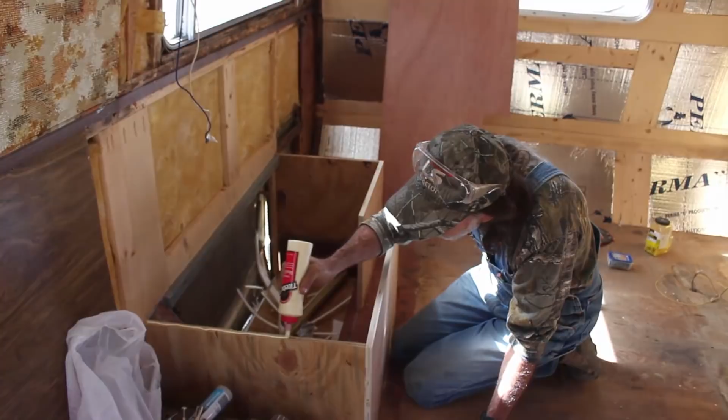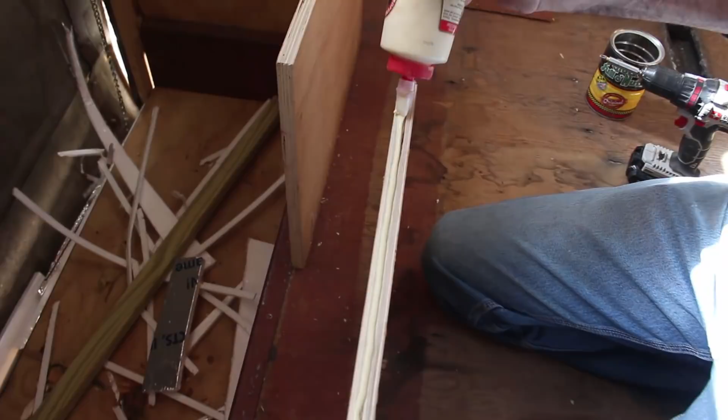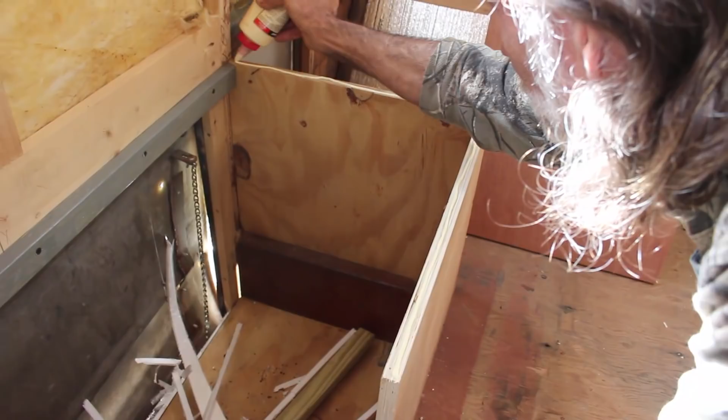I like to put a good heavy coat of glue, and I use Titebond because it's non-toxic, and it is one of the better glues that I have ever found to fool with. I like to put a good bead of it on top of it. I want all the support in this thing I can get, because like I said, this thing will probably be moving around, and I want to make sure that it's well supported.

Okay. We can get our top here. We're using 3/4 inch plywood on this cargo box. That's what was originally on it, so we're going to put that back. Try to get it, looks like it's fitting good. And actually this is just rough-in stuff. We're actually going to come back and cover this with something else later on. But we're going to try to make this fit.

I always want to screw what's next to the wall first, because that way you know you've got it when you do that. Make sure it's held tight, because you can see you want a good tight seam.

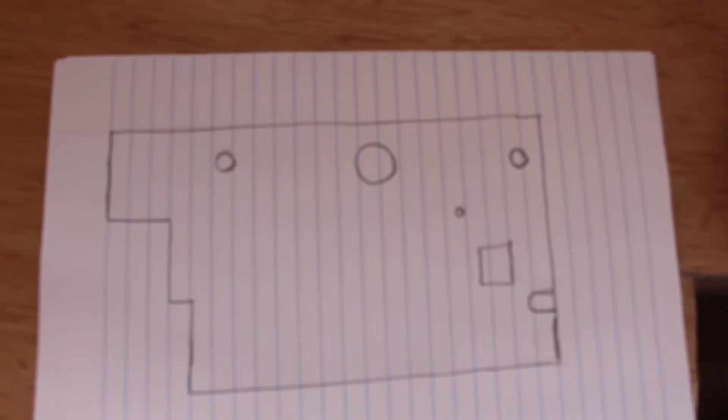Okay guys, one of the better things to do is to draw this stuff out on a sheet of paper, and I have every hole I have to cut. They're not to graph or anything, but I want to know on my paper where I'm going to be cutting these holes out. And the first thing you want to do is measure all the perimeters and get all of that established before you start measuring your holes and squares to cut out. So that's what I'm going to be doing to start with. I'm going to try to get all my perimeter measurements. 17 3/4, 18 1/2.

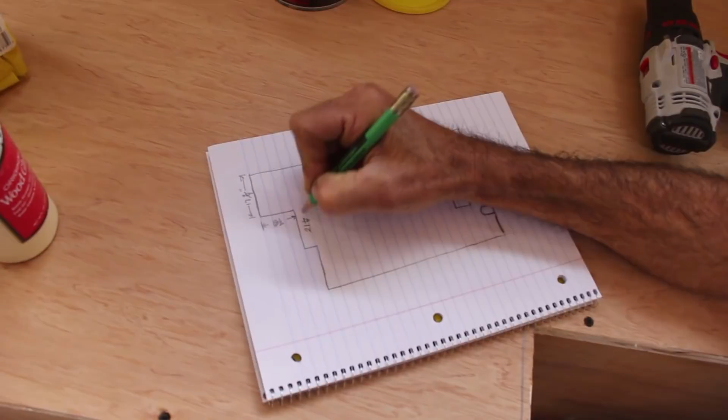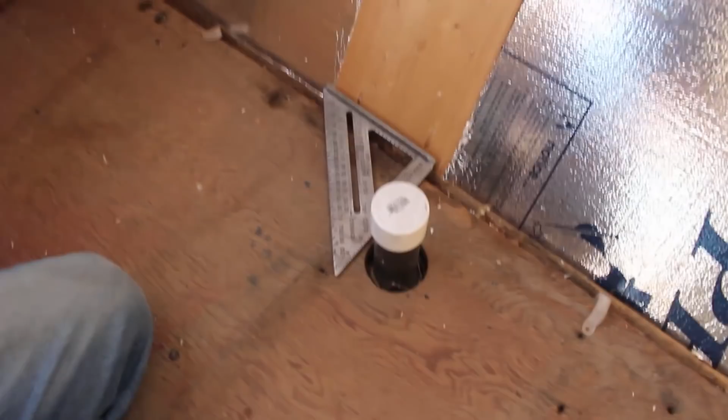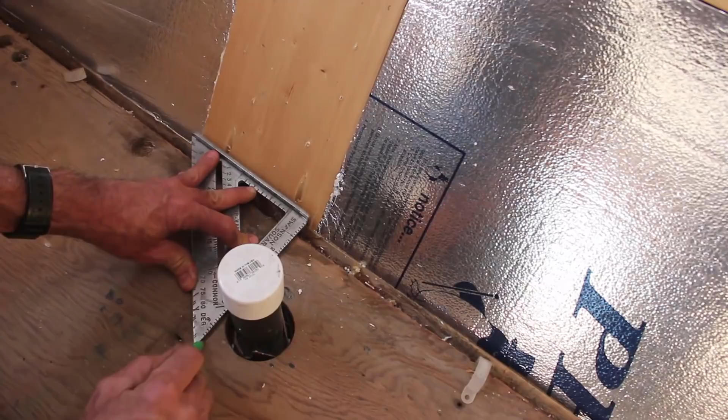Okay, a lot of people don't know how to come up with measurements for things like round pipes and stuff like that. I'm just going to use a speed square to show you how to do this. The easiest way to do it is to take your speed square and put it against the back of something that you know is square, like we know the back of this is square, and you want to draw your pencil line across here like this so that you actually have something to measure to. This gives you a way of measuring. Now, if I measure from the other side of this hole to my pencil line, I have a 2.5 inch hole there.

I automatically know if this is 2.5 inches from here to the pencil line that I made, that half of that is 1.25 inches. So I'll take my tape measure and I'll find 1.25 inches on it here, and I mark it. And what that does is that gives me the center of where I need to drill this hole in this direction. And basically it'll be the same thing when you go this way.

You want to always turn your tape measure up on its edge, because if you put it down flat ways, it holds you off of the wall, whatever your angle is. This one happens to be about 3/16 of an inch, but if you turn it up on its edge, then it gets you all the way to the wall. Now if I do it this way and I look on the back side right here, I can already tell that it is 3 3/4 inches to the back side of this.

So what you'll do then is take your drawing here, and I know that this distance from the back of it here is 3 3/4 of an inch. Then what we want to do to get this other measurement, being we know the center of the pipe now, we can come here. We see that it is 29 3/4 of an inch. So what I'll do is I'll come to the center of this pipe, and 29 3/4 inch. That gets me to here.

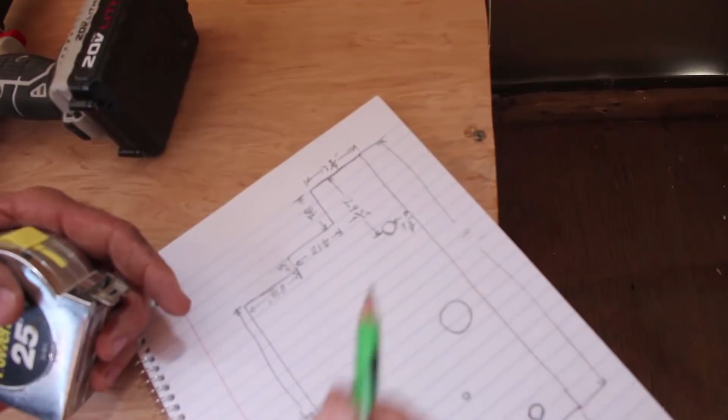But now the 3 3/4 was to the edge of my hole there. So we know this was a 2.5 inch hole, so we're going to add 1 1/4 inches to this. So what we'll end up with will be 5 inches to the center right here of that. So now I'm going to take away my 3 3/4, because I don't need that now.

And we're going to put this is like 3 3/4, and 1 1/4 makes 5 inches from here to here. So when we make this cross in the center of this, that is where the center of our bit will go. And when we drill our 2.5 inch hole, it should be exactly where that is at.

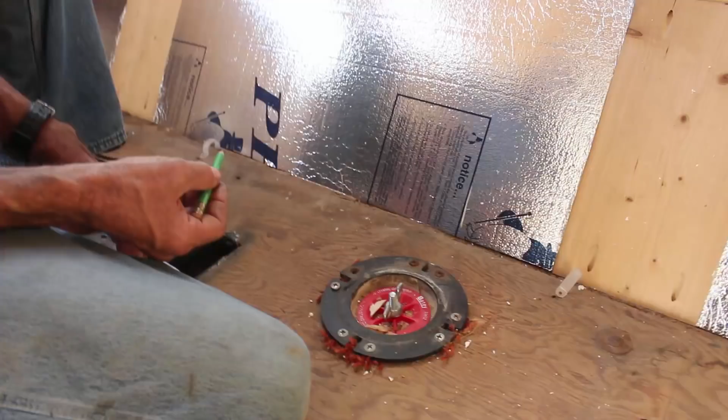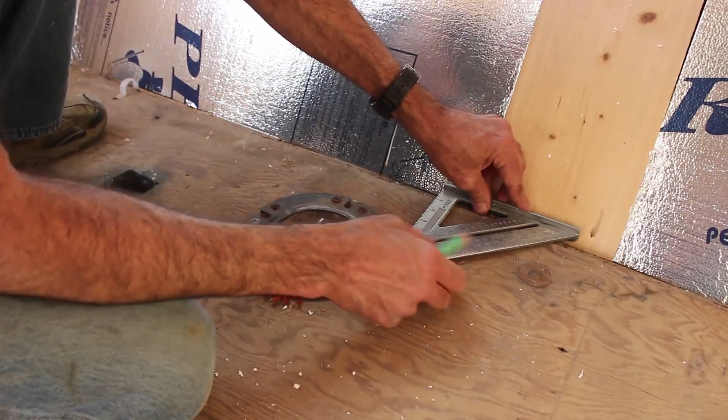Okay guys, this one's a lot larger in diameter, so we're going to do something a little bit different on this one. I'm going to set my square up where it's just barely touching the wall here. I'm going to draw my line, because my square is touching the edge of this now at its widest point. Okay, we're going to move our square over to the other side. We're going to set it up, and we're going to do exactly the same thing there. Now we have 2 lines here. This will tell us the exact width of this here.

And of course you could just measure right here, but you got a nut in the way and it kind of gets a little bit aggravating. It says it's 7 inches. Let's check back here. And see, that's the whole issue here. This, with that nut being in the way, says that it's 6 7/8. And when I measure back here, it's 6 3/4.

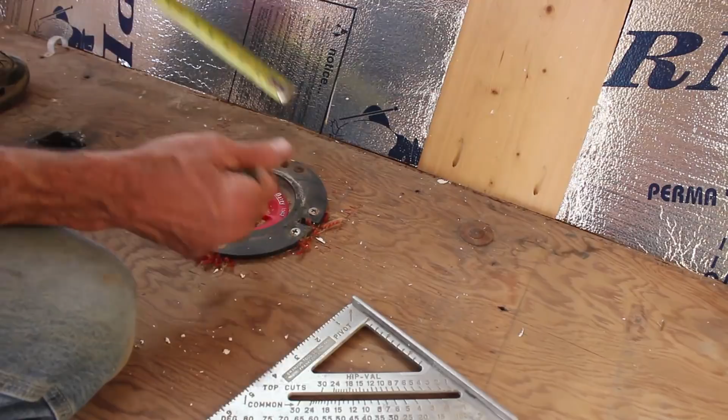So the tape measure bowing over that is giving us a little bit of a false reading, but you don't have to be exact, because you can leave a little space around it. It's not going to hurt. If you ever go to use it, your wax ring is actually what seals that up. So we know that we've got 6 3/4 that away. And then if we come off of this back wall, it is 4 inches to the back of this right here. So we're going to put that on our paper again.

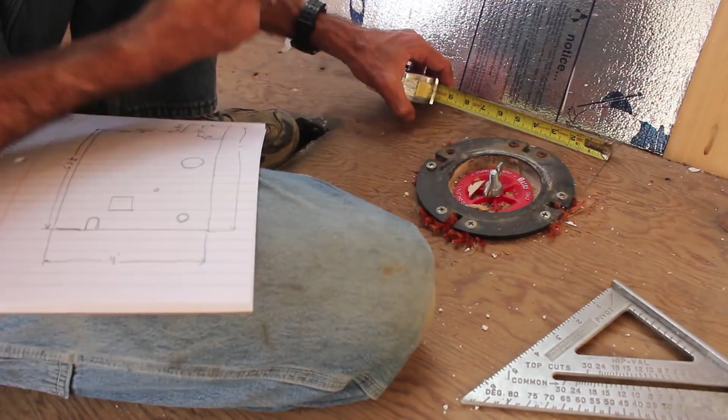We know that if this is 6 3/4 of an inch right here, that half of it is 3 3/8. And what that does is that gives us the center of this here. Now, of course, I could lay a square on this wall and pull it right over the top of this right here, and that'd be close enough. And if you want to do that, that's fine. I'm just breaking it down to show you the actual way to do it. And now that we have the center mark here, I'm going to go all the way back to my wall over here.

And I'm going to measure across. And according to the wall, it is 57 3/8 of an inch to the center of that. So on here, we're going to put 57 3/8 inch to that center. Now that's going to be from our wall over here to here.

Now, coming off of the back, I can't really lay my tape measure up here and do this because this is a slanted wall, and if I do that, that's going to give me a false reading because my tape measure is like a ½ inch off the floor and it's going to shove me way back. So I basically have to go down low like this in order to get an accurate measurement, which is 4 inches. And we automatically know if it's 4 inches, then the center of this was 3 3/8.

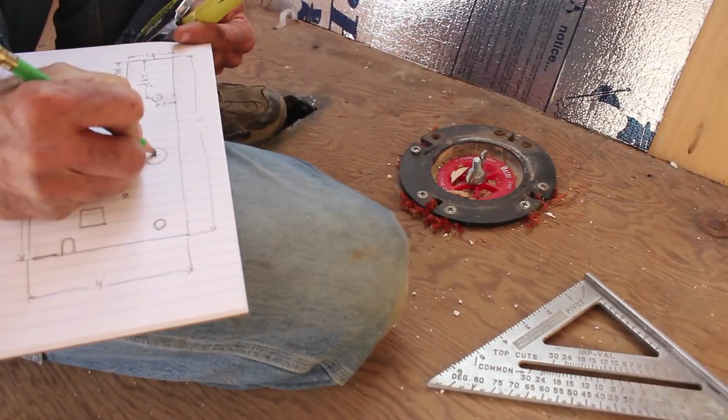So we're going to add 4 inches to 3 3/8, 7 3/8 of an inch to the center of this. If we make our cross in there, we can put 7 3/8 inch. And that will get us to the center here so we can make our circle. Now, because I don't have a bit big enough to drill a hole this size, I'm going to have to take a jigsaw and cut it out.

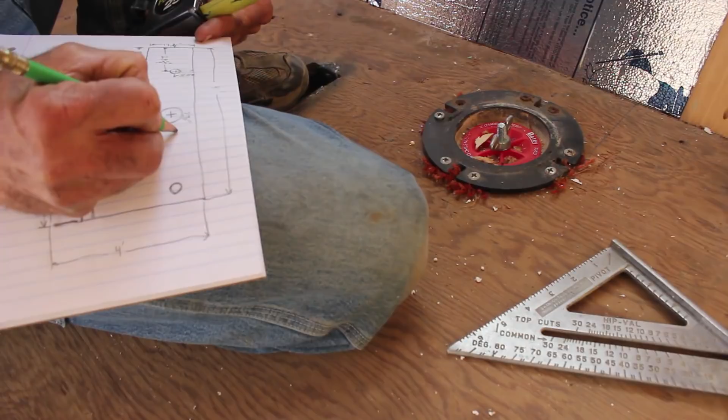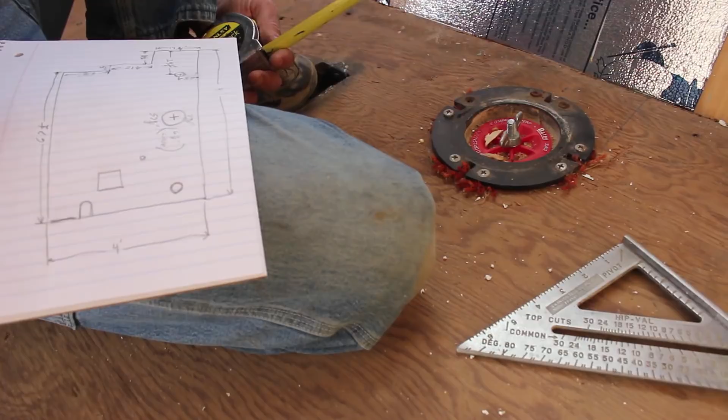So out to the side, I'm going to write 6 3/4 inch circle. And I'm going to put it in parentheses so that I know that that's the diameter of this. Now I'm probably going to fudge a little bit. I'm probably going to cut this like 6 7/8 because you never get anything exactly perfect. And I want to make sure that I have a little bit of room to slide this thing around and move it just a little bit. And what I'll do is come back and fill this full of silicone or something around it here if I think it's going to be an issue.

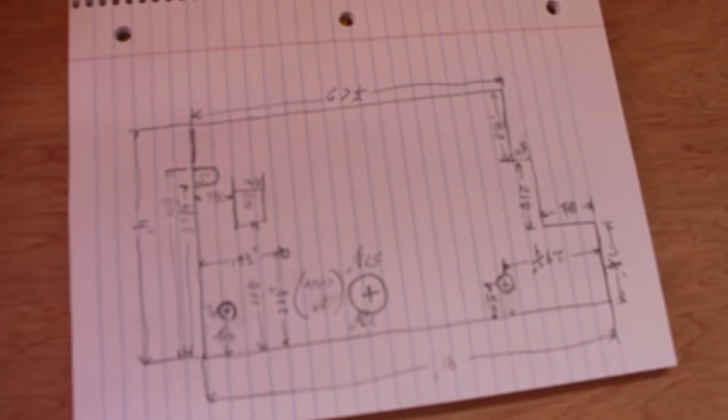Okay guys, this is everything measured out. I know you probably can't read it there, but that's how many measurements there are on this one piece of plywood we're going to be putting down. We're going to pray that after we get it cut, it actually fits.

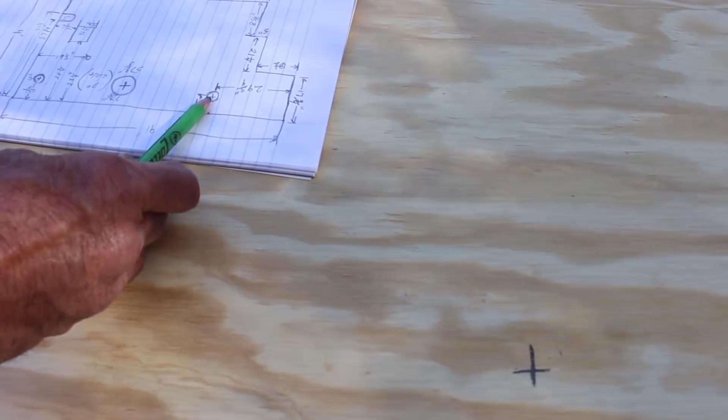Alright, let me explain a few things here. Okay. Let's get our piece of paper out. This X you see right here is this X right here on the paper. And the way we got that is we measured from the end of our plywood here where our mark is at to here. Now, as you can see on the plywood, we have all of our zigzags marked over here, up here, and then across, and then up. Just like we have on our paper here, to all the same measurements.

Now when it comes to the big circle here, I ended up going with 7 inches because I want a little bit of play around it. I don't want to get in there and find out I'm just a little bit too small in some areas because I got to shift the plywood a little bit. I went with a 7-inch circle.

If you don't have anything 7 inches in a circle, I did this demonstration here. You can either use a string and a nail, or you can take the tape measure, and half of 7 is 3 1/2. You can put it on that mark there, and you can mark here and here, and you can rotate it just a little bit. Keep it on that center point, mark 7 on your tape. You can keep doing that around in a circle until you've created this row of dotted lines here. And that will give you a complete circle.

Now you can take your pencil and finish it out because it's not really that crucial. I mean, I can sit here and finish this circle out with a pencil all the way around. I'll have a solid line when I get through. Make it really easy to cut. And that's probably what I'm going to do here, just go ahead and do this all the way around, because I'll be using my jigsaw and I don't want to have to be hunting or waiting for the next dot. I want to know that I'm pretty close.

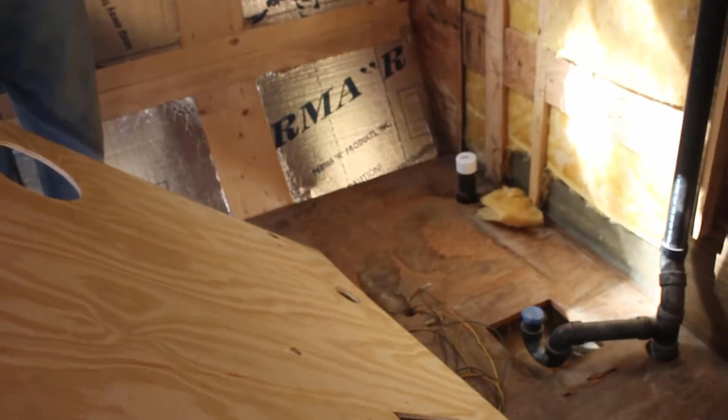And I drilled one hole. I made a mistake, so the plug I cut out of this one, I'm gonna put right back in this one on the floor and just kind of seal around it, so we're still good. I got to cut a drain off over here, and once I get the drain cut off, we're going to see if this thing will actually fit in here.

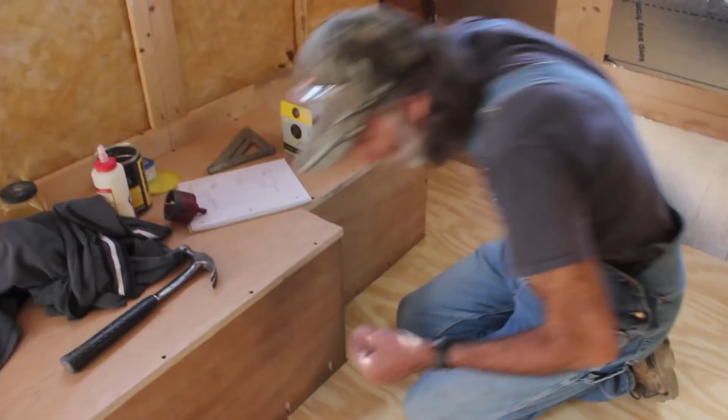Alright, we're using 1.25" drywall screws because we don't want to go too far down through the frame. We got like 1-inch plywood here, and this is 3/8, which this will be fine. We don't want to go too deep. All of our cuts are fitting decent. I actually overcut just a little bit on each cut just to be sure that we were going to be alright. And we're going to just be screwing the floor down to make sure that we're alright.

Okay guys, we've got the floor down now and completed. And one thing, when you put a floor down in an RV, do not skimp on screws. Just go ahead, wherever the high traffic areas are, put the screws down. You know, if you've even got the glue, glue it if you want to. We didn't glue it because I just put a cotton picking pile of screws in the floor. And I don't think this thing will ever move because it's screwed down tight everywhere.

We've got the cargo bay done. Now we have the first sheet of plywood on the floor. We're ready to move on from here. We're probably going to start insulating the ceilings and the walls and trying to get the boarding on that before we go any further in the bathroom.